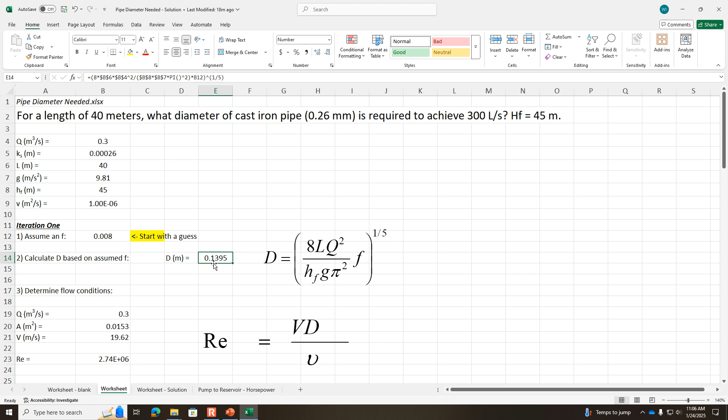So we started with this guess of the F value, and then we used the equation to find out the diameter. And if that is the diameter, and knowing what we do about the flow rate, we'd calculate the area, the velocity through the pipe, the Reynolds number.

Then we updated the F value based on the Jain equation to find out, well, if the water really is going that velocity through that diameter of pipe, what F value should we expect?

And it's a pretty big difference between our initial assumption and our updated guess. So we did a second iteration, saying instead of this wild guess of 0.008, let's start with our better guess of F as the input in iteration 2.

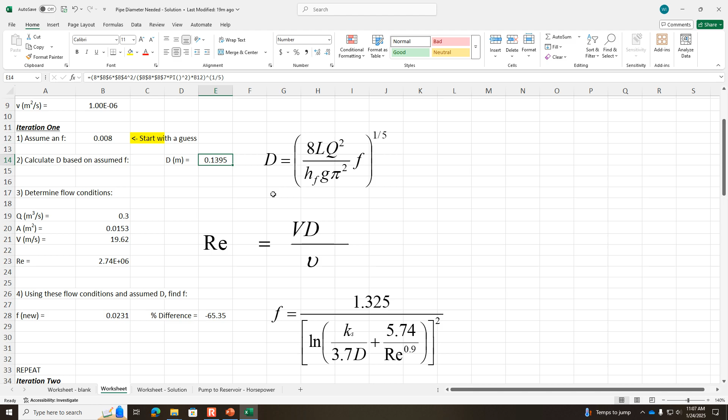So iteration 2, we did the same steps. We used this equation to re-estimate the diameter. Now how have things changed from iteration 1 to iteration 2? Our first guess was basically 0.14. Our next guess was 0.17.

So it's changing still, like on a percentage basis. I don't know, what is that? About maybe 20% it's changed, maybe a little less. So it's changing too much. We want it to lock in and not be changing anymore.

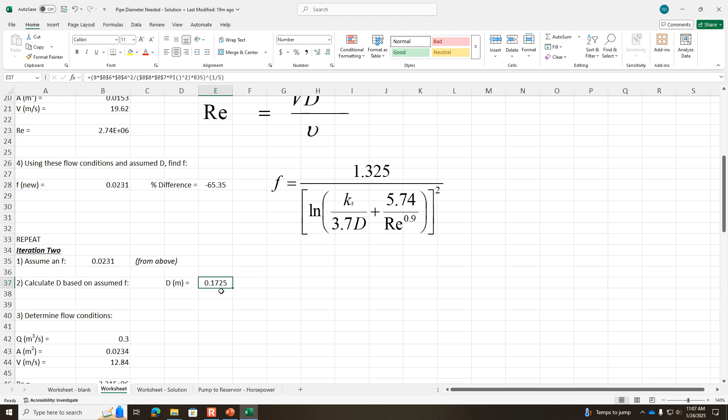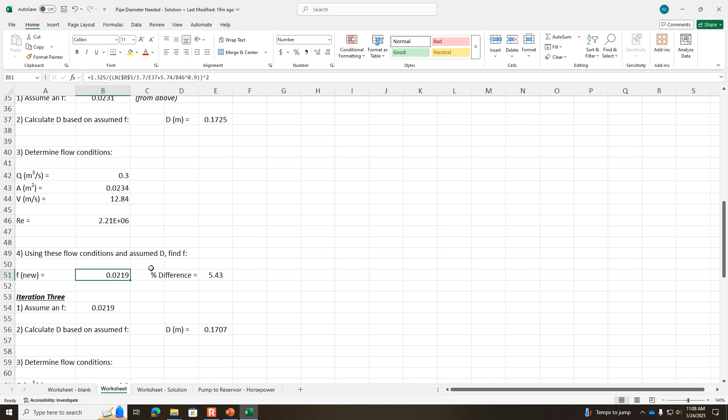So we update now our Reynolds number and velocity based on this new diameter. We find a new F value, and the F value didn't change as much from the input to the output of iteration 2.

It started with 0.023 and it finished with 0.022. So it's getting pretty close, 5% change in this most recent iteration.

So we just keep going through it. The F value now is changing less than 1% within iteration 3, and the diameter is 0.173, then 0.171. So it's also showing signs of converging.

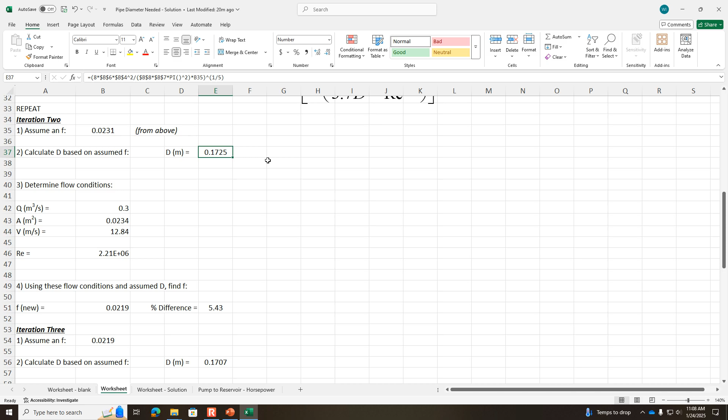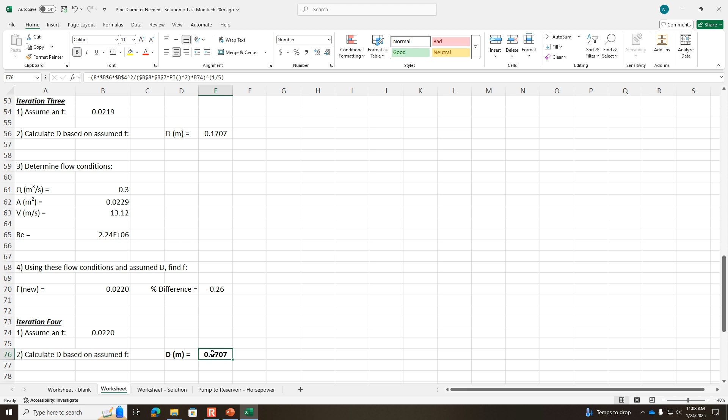And so in the fourth iteration, what we find is that the output diameter of 0.171 is the same from iteration 3 to iteration 4. And the F value also stabilized and converged.

So we could do more iterations, we could do iteration 5, 6, 7, but nothing would be changing anymore. So we say that the solution is converged, and this is our answer. This is how big the pipe needs to be.

So with that diameter of pipe, the water will go 300 liters per second. If we used a bigger pipe, the water would flow at more than 300 liters per second.

If we used a smaller pipe, the water would flow at less than 300 liters per second. Either way, the head loss is going to be 45 meters. That's the driving force that's getting water to go through that secondary pipe spur.

So they probably don't make a pipe at exactly this diameter, right? So what we need to do is ask the client: do you want to put a valve on here so that you can get exactly 300 liters per second?

Or, if the answer to that was yes, then you'd get a slightly larger pipe, and you just use the valve to control the flow at the end of the pipe.

If they didn't want to put in a valve, and maybe 300 wasn't exactly what they needed, maybe 280 would be okay. Then maybe it would be okay to downsize the pipe.

So you have to think in logical terms when you get some odd pipe size like this. Should I go to 0.15 meters? Should I go to 0.2 meters? If you undersize, the flow rate would be less. If you oversize, the flow rate would be greater.

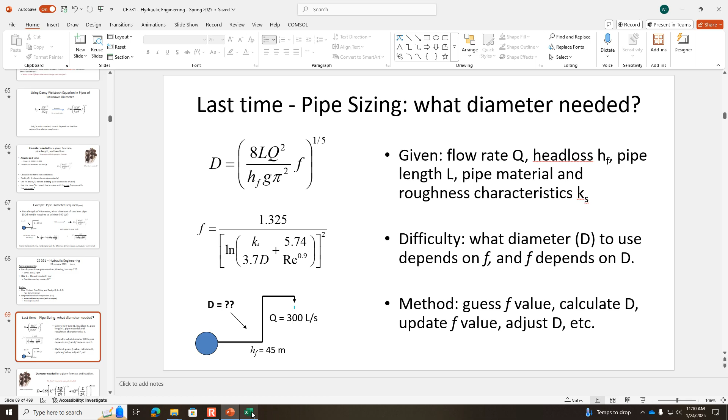This method is very accurate, especially because we're using the Darcy-Weisbach equation. We're using the Jain equation within the range that it's intended for. We could swap out Jain and use Colebrook instead, but it wouldn't improve things. So this is a fully justified application of Jain, and we get good results.

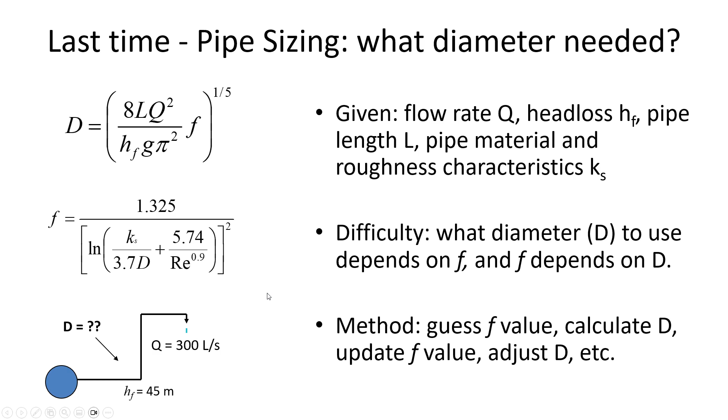This is the so-called easy way of doing it. This is an explicit equation that lets you estimate the diameter just by substituting in the things you know about the pipe. What makes this easy is that we don't have to iterate—no spreadsheet required. But it also looks kind of hard.

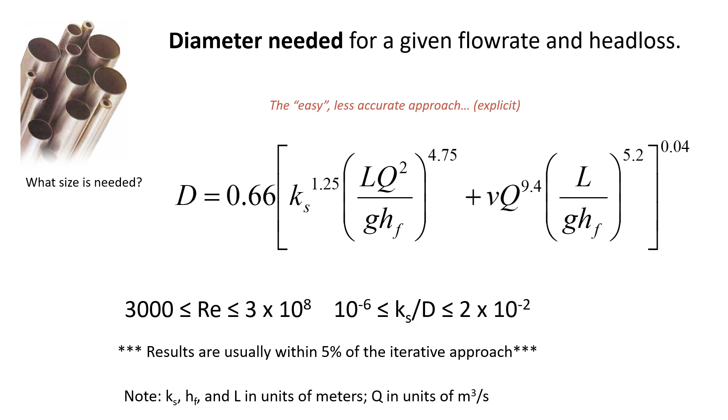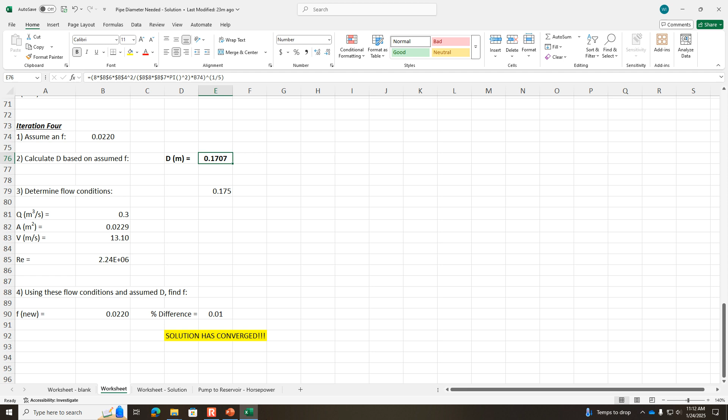Lots of opportunities for a mistake. So let me give you a taste for that. Let's pause for a minute, and I'd like you to try using this formula for the same conditions described here, where we came up with the answer of 0.171 meters.

Let me write the parameters on the board for that previous example. We had K sub S, which was 0.00026 meters. The length of the pipe was 40 meters. The flow rate Q is 0.3 cubic meters per second. H sub F was 45 meters. The kinematic viscosity of water is 1 times 10 to the minus 6 meters squared per second. And of course we know G, 9.81 meters per second squared.

I'd be delighted if half the class gets this right. You know what you're looking for—about 0.17 meters. But it's just so easy to make mistakes in an equation like this.

My recommendation to avoid those mistakes is to work in steps. Don't put the whole thing into your calculator all at once, but calculate intermediate quantities—find the result of what's in the bracket and double check, then take it to the 4.75 power, and so on.

All right, so I'm going to pause the recording and stop talking, to give you some time to calculate here.

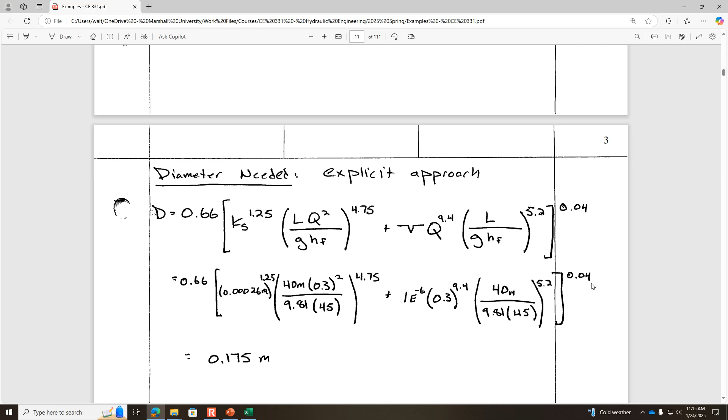You're taking things to some exponent and adding it, then to another exponent, and another thing that makes this a little tricky is making sure you put the right units into the equation. Everything should be in traditional base SI units, so K sub S should be in meters, not millimeters, and flow rate should be in cubic meters per second, not liters per second. Everything needs to be in its base units here.

Whereas the iterative approach told us 0.171 meters, this explicit estimation says 0.175. So, there it is.

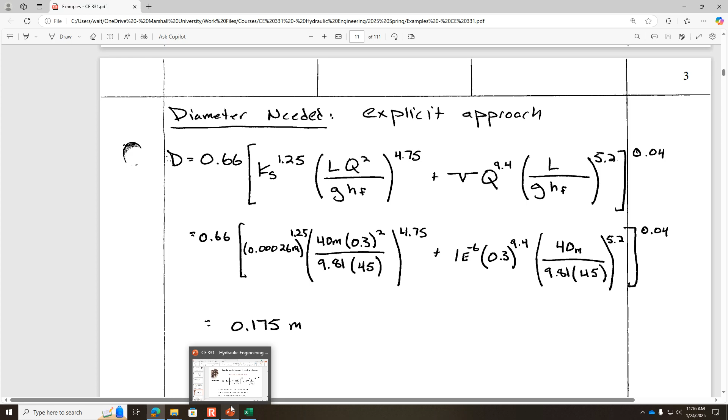We've got some methods to estimate the pipe diameter needed when we know the head loss through the pipe—that's not always the case. More often, what we're trying to find is what the head loss will be if we use a certain diameter pipe. This example is important to know, but ordinarily the circumstances are reversed, and we analyze by checking different pipe diameters we have available—like if you can get a commercially available 4-inch pipe, what's the pressure downstream if you use it, and then deciding whether to upsize or downsize after looking at the results. Any questions before we move on?

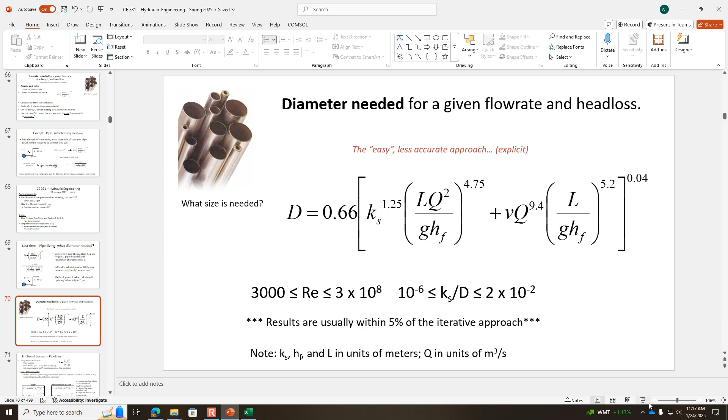We've been using the Darcy-Weisbach equation, and it's very accurate. It's applicable over a broad range of conditions and fluids. We could use it for water, but you could always use it for other liquids as well—anything that you know the viscosity for.

But the downside of the Darcy-Weisbach equation is hand in hand with why it's the most accurate: the F value responds to the flow condition. That's what makes it so accurate—the friction factor more truly represents reality. The reality of flow through a pipe is that the effect of the pipe wall causing friction depends on velocity, the diameter of the pipe, the material—there's a lot of factors it depends on.

The other more simple methods don't have a variable F value; what makes them simpler is that the friction coefficient is fixed. That's not realistic—it's a simplified model of reality that we like for its simplicity, but we don't trust it where accuracy is really important.

The Hazen-Williams equation is the best known and maybe the most useful of these other methods. Its limitations are that it only applies to water, so we couldn't use it for glycerin, alcohol, or diesel fuel going through a pipeline. Hazen-Williams is just for water—that's okay, since it's what we use most in civil engineering. It's only applicable over a certain range of pipe diameters: 50 millimeters, that's 5 centimeters, about 2 inches. So most of the pipes we deal with are bigger than 2 inches, but not all.

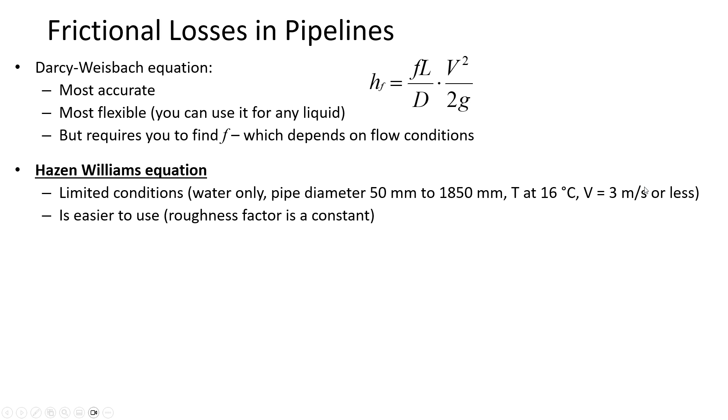Interestingly, the viscosity is fixed for water at 16 degrees Celsius, I guess because that's the temperature water is often at when it flows through municipal pipes, and a velocity of 3 meters per second or less. The reason it's easier to use is that the friction factor C is just looked up based on the pipe material. Ductile iron pipe would have one C value. There's no Moody diagram, no equivalent Colebrook equation for Hazen-Williams, because you just look up the C value from a table, and it's the same regardless of flow conditions.

If you think about water flowing through a horizontal pipe from one location to another, what's driving the water in that direction is a pressure difference—that's why the water is flowing. So how big of a pressure difference dictates the velocity of flow through the pipe. If you're given a difference in pressures, you'd find out how much energy loss that's equated to as the water goes through the pipe, and substitute it in to find the velocity of flow.

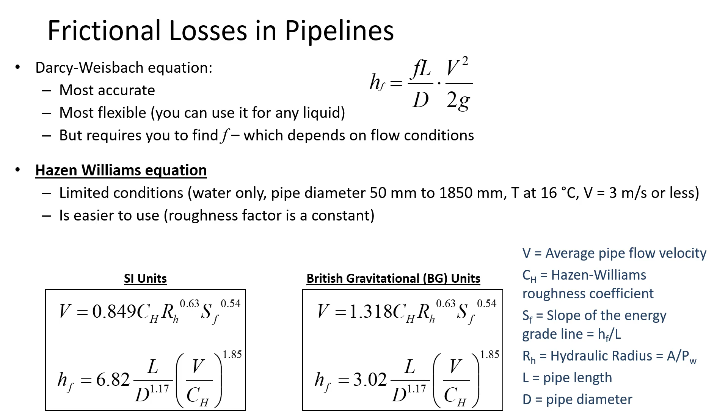That's stuffy in here, right? Any questions about the Hazen-Williams equation?

Let's get some practice. We've got a tank that's open to the atmosphere, and the water surface elevation is 103.5 meters. We're setting that as location 1 in the energy equation—it's where we know something. We know how much energy there is in the tank because we know the elevation of the water in the tank above some datum is 103.5. If the water's flowing from the tank through the pipe to the spigot, location 1 is the tank.

The pressure is 0 at location 1 because it's vented to the atmosphere. Z at location 1 is the water surface elevation. The velocity of the water sitting in the tank is 0. Between 1, the tank, and 2, the spigot, there's no pump between those two points, so we cancel out the pump term.

The pressure at 2 is what we're trying to find—what is the pressure at the spigot? We're talking about just before the water comes out of that valve, because once the water vents to the atmosphere and comes out, it no longer has any pressure. So P2 is unknown, and Z2 is given because we have the physical elevation of the valve.

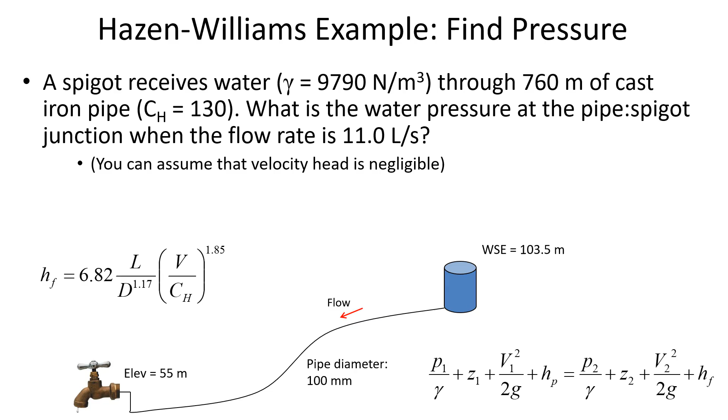So water's flowing from a tank through a pipe to a valve that's going to discharge it into the atmosphere. And we want to know, just before the water comes out of that spigot, how much pressure does it have, when the water is flowing at 11 liters per second through this 0.1 meter diameter pipe.

So the equation that we're using for energy loss, Hazen-Williams equation, we need to know the velocity of the water through the flow. That's one of our first steps, is to find out how fast the water is moving. So from the diameter we get the area of the pipe, and then from the continuity equation, Q equals VA, we find that the velocity is 1.4 meters per second.

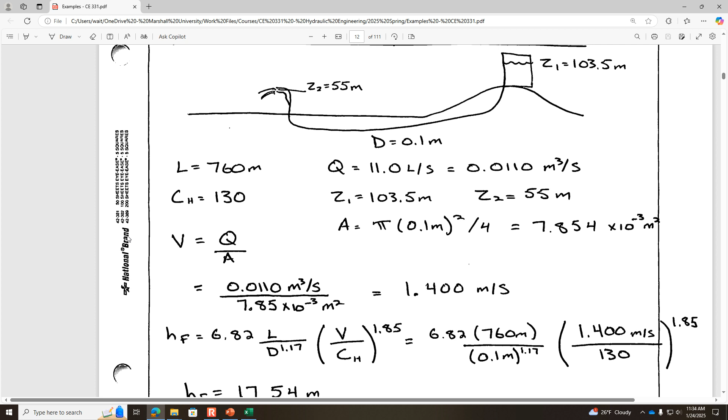Okay, so it's moving along in the water, it's losing energy as it does so. Of course, there's an elevation difference too that we have to keep track of, but the head loss due to pipe friction is 17.54 meters, if we put it into the Hazen-Williams equation for the given C value of 130.

Did it say what kind of pipe that is? Iron, cast iron, pipe of 130, CH of 130.

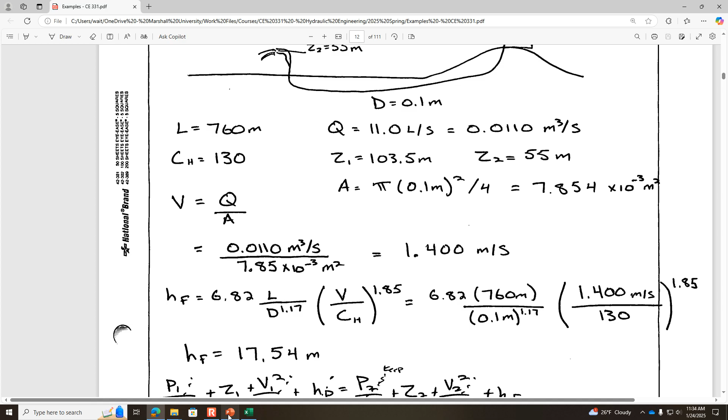Okay, so now you can see how I've canceled out the energy equation. Since the water's flowing from a vented tank, the pressure head at 1 is 0. The water inside of the tank is stationary, so the velocity head at 1 is 0. It does have some elevation that we're going to need to include. There's no pump between 1 and 2.

I accidentally canceled out P2 here as I was working through it. That's actually what we're trying to solve for, P2. Elevation at 2 is applicable, and I told you to neglect the velocity head. I'll show you in a minute why we're able to do that.

So rearranging that to solve for P2, we get that the pressure head at 2, the pressure at 2, is 303 kilopascals.

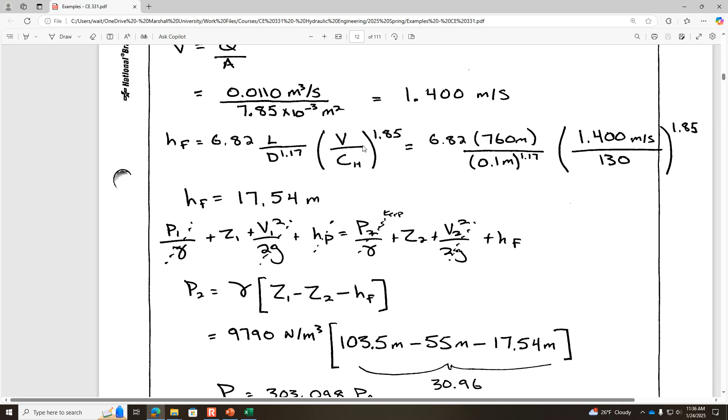I think it's a good idea when you do these calculations not just to write the number in the formula. You notice how every time I substitute values into the formula, I also include the units. I think that's a pretty important habit to avoid making mistakes. It takes up more space, so you have to factor in the cost of the pencil, but I do think it's a good investment of your time, because if you've got the wrong units in there, you're more likely to see it if you notice when you're writing the units next to the number. So it would be easy, for example, if you were just seeing 11 liters per second, Q equals 11, and you put 11 divided by the area, you're less likely to notice that you've made a mistake if you don't write the units. But if you wrote 11 liters per second, and then you wrote the area in terms of square meters, then you're going to see the issue. So I'm going to try and be a good example this semester, and in the examples I show you in class, I'm going to try to remember to always include the units. I'm tempted when I'm in a hurry not to include them, but I try to avoid that temptation because I'm prone to making mistakes just like everybody else, and you're less likely to make them when you include the units in your intermediate calculations.

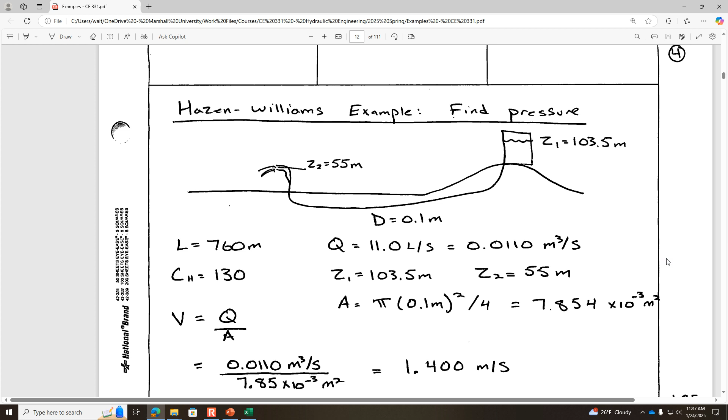So pressure at 2 is 303 kilopascals. So why could we neglect the velocity head here? We do know what the velocity is. Let's just see how big is the velocity head at 2.

So at location 2, the velocity head, V2 squared divided by 2g, the water was going 1.4 meters per second. Square that, divide it by 2g, 2 times 9.81 meters per second squared. So the amount of energy that's there is 0.0999 meters. That's the energy head that's kind of wrapped up in the velocity head at location 2.

And if you multiply that by gamma to get the pressure, like if this is the head, then pressure is gamma times the head. It is equivalent to 0.98 kilopascals. So if we hadn't neglected the velocity head, and if we did include it, it would actually be 302 kilopascals instead of 303. So you can include it. It's not wrong, but it changes the final answer by less than 1/3 of 1%.

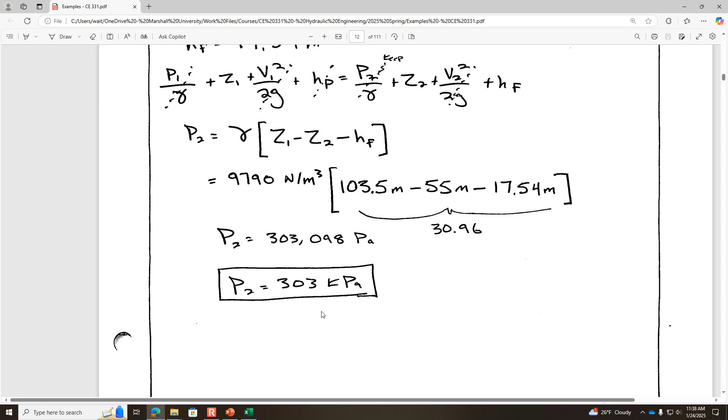This formula is not accurate to within 1%. So if we're doing things quick and easy by using the Hazen-Williams equation, then we might as well continue with this quick and easy approach and neglect the velocity head at 2.

All right. So any questions so far about applying the Hazen-Williams equation when we're trying to find the pressure downstream?

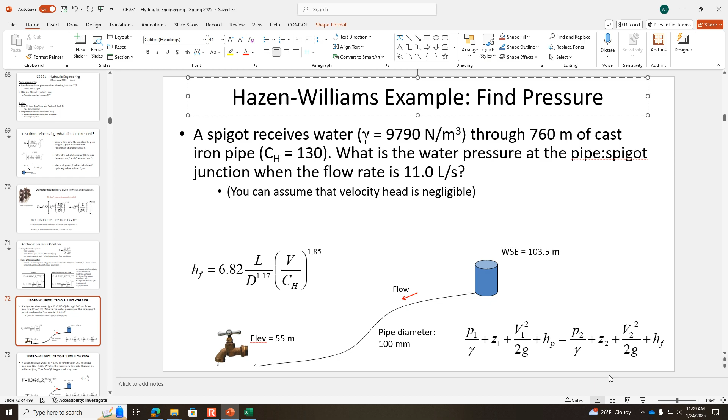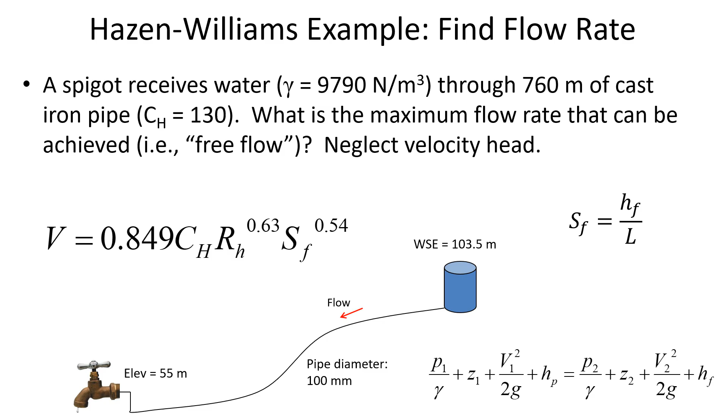Okay, one more thing I want to clarify. By free flow rate here, location 2 is just outside the spigot. In the previous example, we were trying to find out what's the pressure inside the valve. This time what we're saying is, take location 2 just after the water is discharging from the spigot, so the pressure at 2 is 0. P2 is 0.

So the elevation difference is driving water through the pipe. It's the energy that's overcoming the flow resistance. And there's going to be an equilibrium. The flow resistance is going to be in equilibrium with the amount of elevation difference, and the flow rate through the pipe is kind of like the deciding factor in how much energy loss there is, and the amount of energy loss is going to be equal to the elevation difference.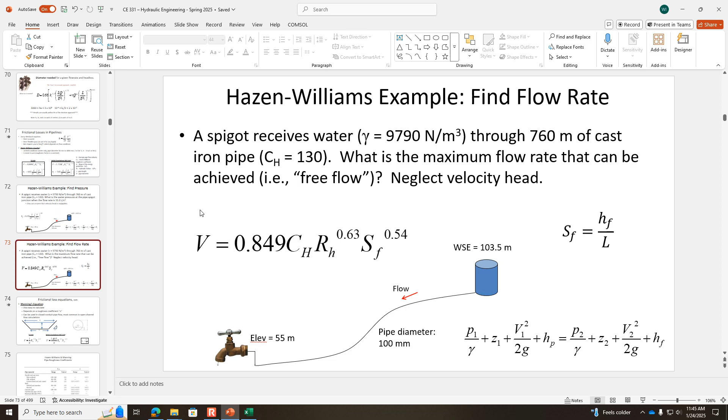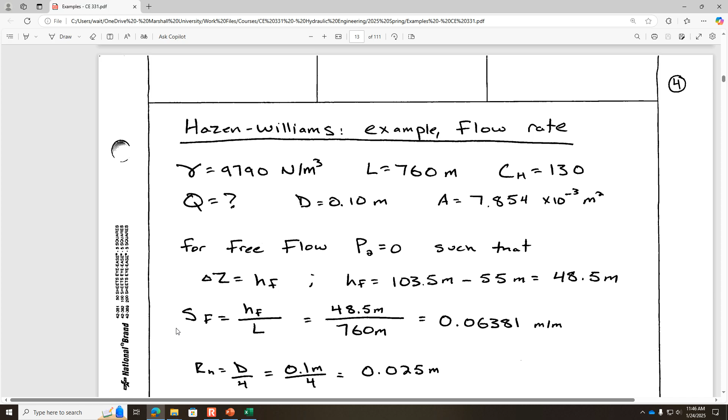So the head loss that's available to drive the flow through here is 48.5 meters. The slope of the energy grade line is the head loss due to pipe friction divided by the pipe length, 0.06381. Remember, for a circular pipe that's full of water, the hydraulic radius is simply the diameter divided by 4, so 0.025 is the hydraulic radius.

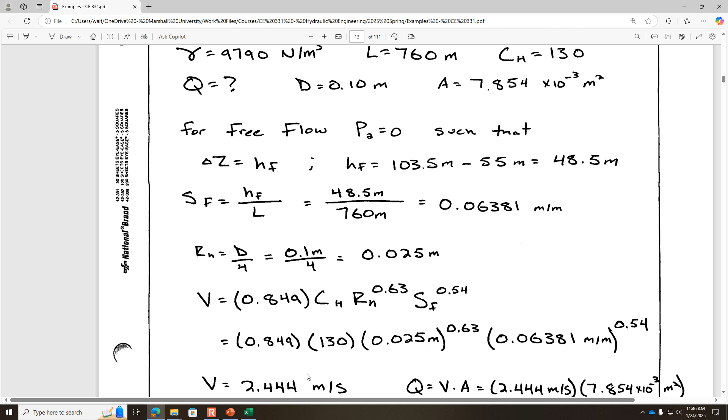All right, now we need to substitute it into the Hazen-Williams equation. So 0.849 times the coefficient of friction 130 times the hydraulic radius to the power of 0.63 times the energy grade line slope to the power of 0.54. And I think when you do that, you should get that the velocity through the pipe is 2.444 meters per second. Then once we know the velocity, we multiply it by the cross-sectional area of the pipe, 7.854 times 10 to the minus third meters squared, and we get a flow of 19.2 liters per second.

So that's the most we can get through that pipe. If we need more, we could put in a pump. We could make the pipe diameter larger, or we could raise the tank. But this is the equilibrium that will arise for free flow through that pipe, as described by the Hazen-Williams equation.

Are the units for seconds just included in the constant? Yeah, this is not a dimensionally homogeneous equation. This empirical equation, you magically come up with meters per second when you put things in here. Like, what is hydraulic radius to the power of 0.63? What are the resulting units of meters to the power of 0.63? It's effectively meaningless, the units. So this is just an equation that was derived by observation.

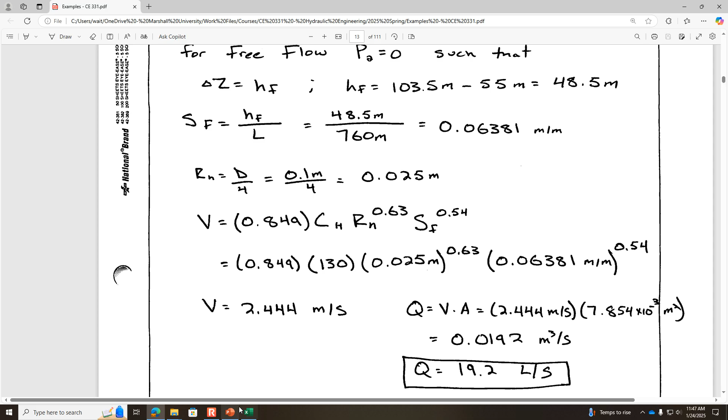Okay, so there's also the Manning's equation, which we won't talk about today because I'm letting you out 2 minutes early. But there's a table in your book that has the friction factor, so be aware that you can go to the text to find the C sub H values.